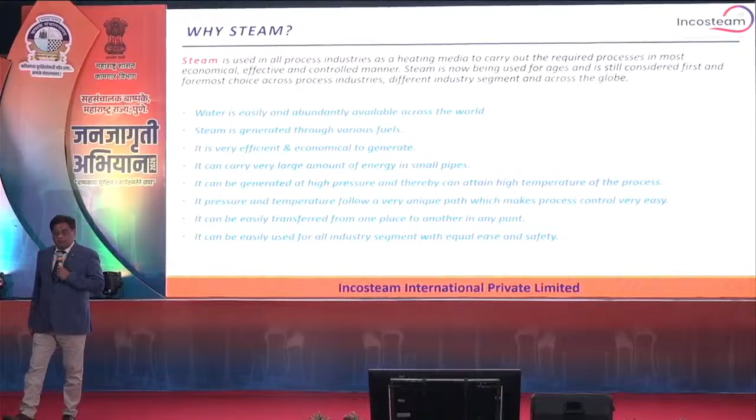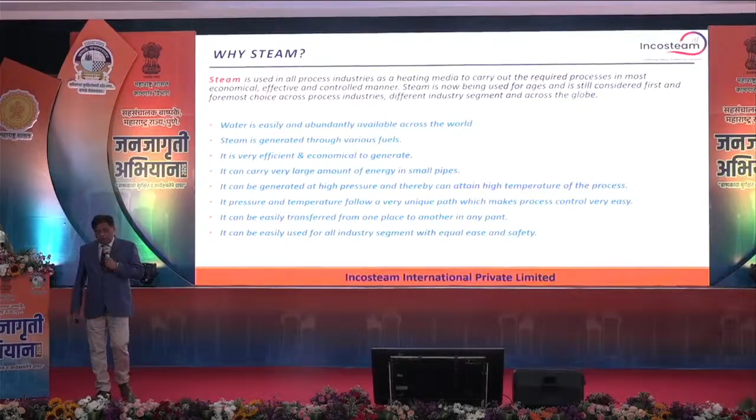So steam, we are all talking about steam from the morning. Steam is the backbone of industry, which is used for all industries. Why? Because it is very easy to make through boilers. Water is easily available. Steam is generated through various fuels, like we can use oil, we can use biogas, biofuels, and we also heard about hydrogen as the upcoming fuel. It is very efficient and easy to generate. It can carry very large amounts of energy in very small pipes. And most importantly, it follows a unique temperature and pressure curve by which we can easily control it for all our processes, however complex they may be.

Steam has been used for ages. I will show you one engine. This is the earliest usage of steam - the first usage of steam was in coal mines. The coal industry long ago had a peculiar problem of water coming into the coal mines. For removing that water, steam was used, and these were the engines developed at that time for taking out the water from the coal mines. That was the first industrial use of steam.

And now we can see that for all industries - chemical plant, pharmaceutical, paper, food and beverages, rubber - you can name any industry, power, everywhere we use steam. It started from coal, and now we are seeing that it's everywhere.

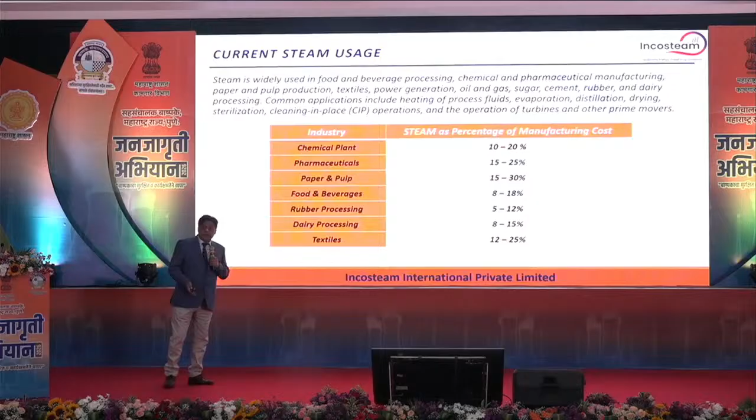Why this session is so apt now is because if you look at all industries, the manufacturing cost of steam is very, very high. For example, for any chemical plant, it can go up to 20% of the manufacturing cost of a chemical, including raw material. So efficient use of steam becomes so very important, because we can see nothing is less than 10%. Paper and pulp is 15%, 30%, pharmaceutical is 25% - that's the entire manufacturing cost attributed to steam.

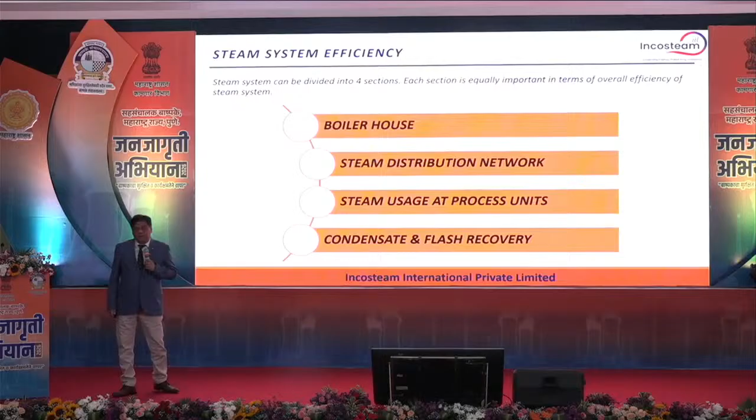If you talk about steam, these are the 4 pillars: boiler house, steam distribution network, steam usage at the process plant, and condensate and flash steam recovery. These are the 4 basic areas.

There is a loss at every stage. So at the end of the session, I will show you how we can optimize this, and I will show you the graph we can follow after optimizing, and what the total benefits are that we can reap out of this optimization.

Any doubts still here? Okay, great.

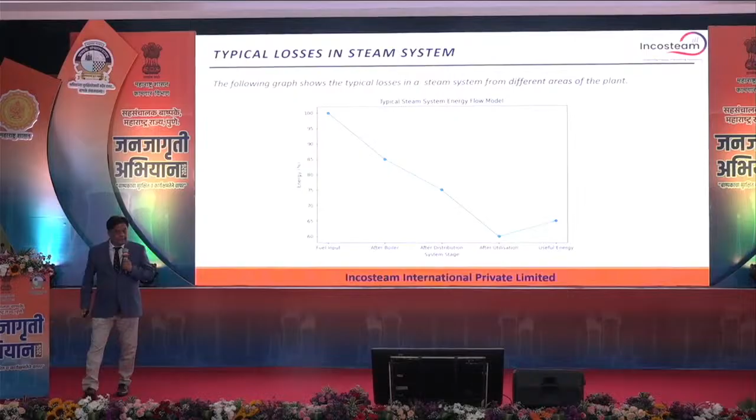If we talk about boiler house, there are different things like stack loss - this session was very nicely covered with our friends from Forbes Marshall. Excess air, poor O2 control - again, the same thing. Blowdown loss, radiation and convection loss, poor feed water heating, quality of steam, which is generally not spoken about - we always talk about efficiency of the boiler but many times miss talking about quality of steam getting out of the boiler. Air preheating - these are a few of the things important to monitor for process boilers. We'll see in between.

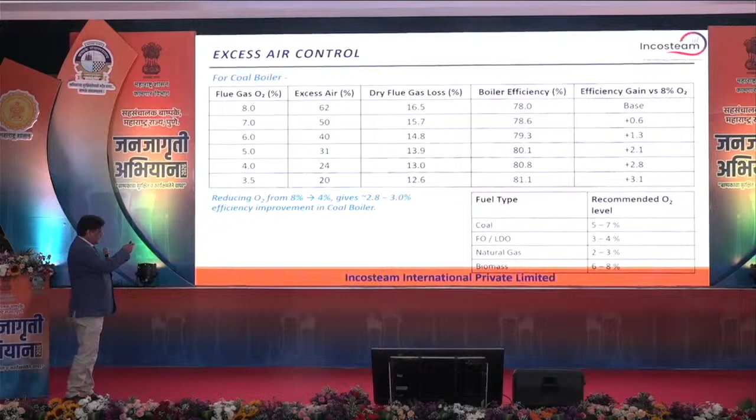Importance of drum level control - this is what we talk about regarding quality of steam, which is actually very, very important. For process boilers - this session is specifically about process boilers - the operations are such that it is start and stop, with batch times, so this becomes very, very important. Another thing with process boilers is the difference between peak load and low loads - that also varies. Most process boilers today use single element control, where we are operating the pumps.

What we talk about with a three-element control system is boiler drum level control, which we all do, boiler feed water flow rate, and steam flow rate. This is so important because whenever there is a sudden surge of demand from the plant, there is a tendency of water carryover. How we can reduce it, how we can foresee it earlier, and ensure our systems are integrated such that these problems don't arise.

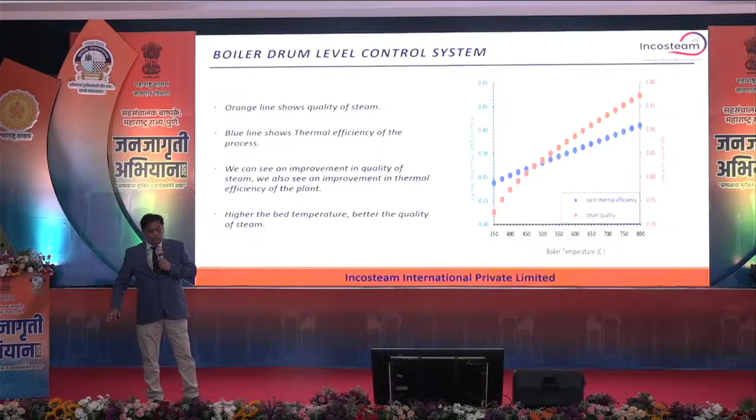So it's important that we have good quality steam, and that means water carryover from the boiler should be at minimum, even with varying loads. If it's a constant load, it's easy to maintain. But with varying load, where the highs are high and peak lows are low, with certain fluctuations, this three-element system plays a very important role, ensuring you still have good quality steam coming out of the boiler even with peak and low loads. Any questions on this? Okay.

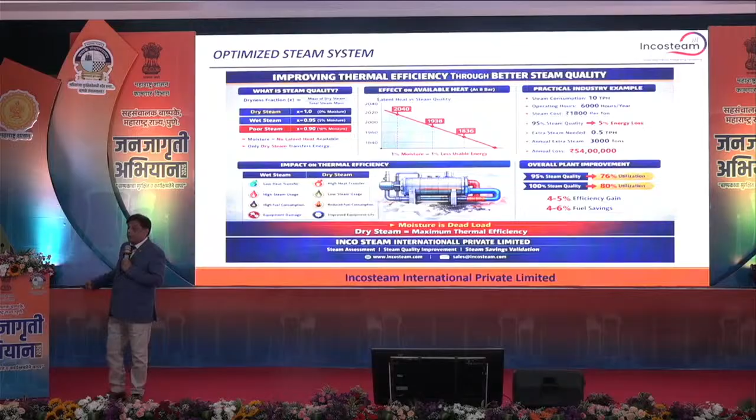Again, with a three-element control system: handle sudden load, better level stability, improved boiler safety, faster response to load variations, and so on.

This is also very important. We have seen that so many process boilers below 10 tons - 4-ton, 6-ton, 10-ton boilers - their feed water arrangements are not properly designed. We talk about starting with the feed water tank size, how we control it, and automation. Antapurka sir was speaking about certain automations in place, and why these help. If you have proper automation in feed water management, we have huge opportunities for improvement. Every 6-degree rise in feed water temperature ensures 1% saving in fuel. So it's very important to have good, or more than good, optimized feed water control.

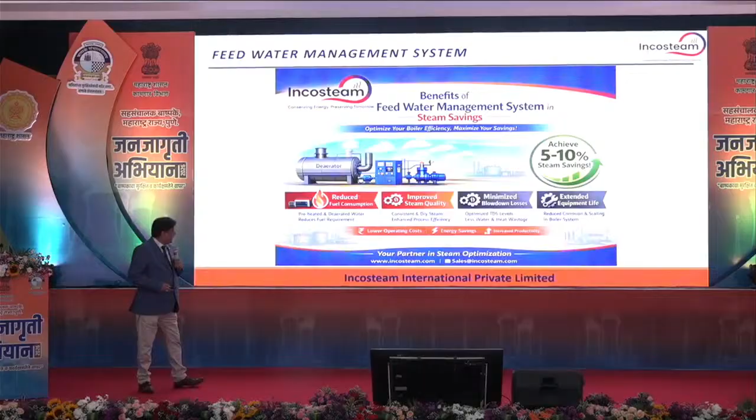I have tried to make pictorial slides here for easy understanding. If you have good feed water control, your fuel consumption reduces, you have improved steam quality, minimized blowdown losses, and the equipment life increases.

Now we talk about the air preheater, which I think many people must be using. Very simply, every 18-degree rise in feed air into the boilers will improve your efficiency by about 1%. I've shown in pictorial form how the combustion air temperature, when increased, gives efficiency improvement of the boiler, along with annual savings. So it improves boiler efficiency, reduces fuel consumption, improves combustion control, and most importantly reduces emissions.

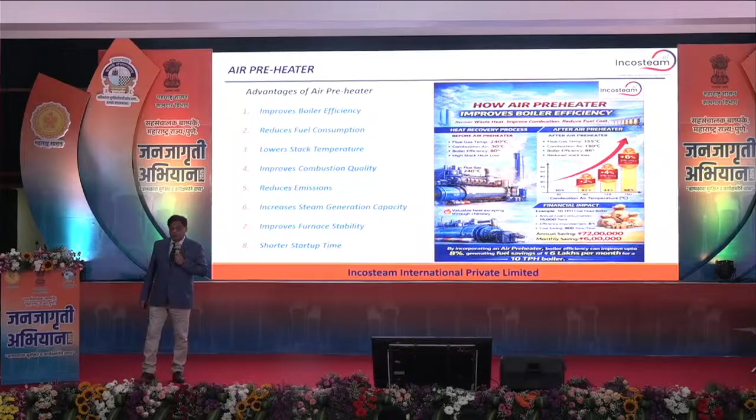More and more we will be talking not only about efficiency but also emission control and increasing generation capacity. As soon as boiler efficiency improves, your total steam generation capacity improves, and you get shorter startup times.

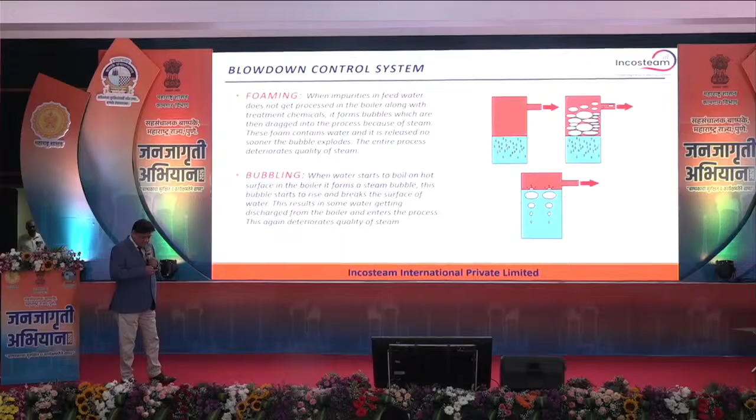Then on the boiler side, I think the last one is control on the TDS. These are the few things by which foaming and bubbling happens and your TDS comes up. We have surface blowdown and bottom blowdown. Why is this important to control? Again, I'll show through a graph.

First of all, it will be very good for the safety of the boiler, and you will also optimize on the overall blowdown total efficiency. You will have lesser blowdown, and more importantly, you will have optimized blowdown with this.

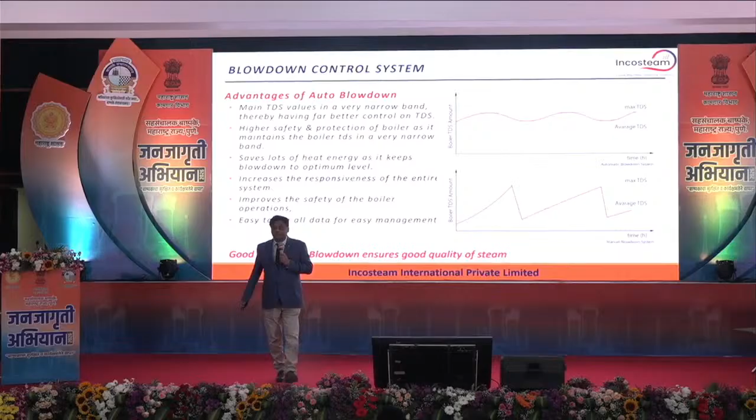Any questions on this? Okay great. So benefit of automatic blowdown - again, I have written the water savings, maintenance. Of course, if your blowdown increases, you have maintenance issues also coming up, and you have fuel savings as well. Because generally anything between 4 to 5% we have blowdown losses, but we can optimize that by keeping the band low.

Now, coming back, the boiler house is complete. We have spoken about all the different elements which actually have an impact on the efficiency of the boiler house. Now we talk about steam distribution network. It is so important - if you remember the first graph, the boiler losses were only 15%, but the distribution losses were about 20%, which is more than the boiler house. Many people talk about boiler house, but distribution also plays a very, very important role.

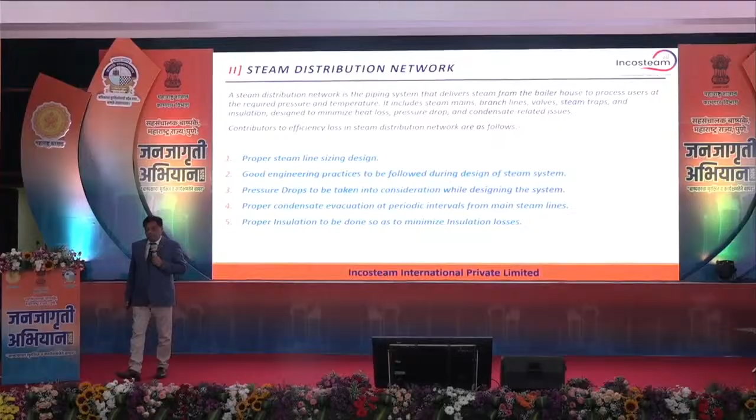Proper steam line sizing design, where we maintain the proper velocities while designing our steam lines. What if our steam is saturated? What if our steam is superheated? We have to take different things into account. For superheated, we take about 50 meters per second, which is okay. But for saturated, we should not go above 25 to 30 meters per second. So those things are there while designing a steam line.

Good engineering practices also play a very important role - how we take the droppings from a main line and all that stuff. Pressure drops to be taken into consideration while designing the systems, again very important. Proper condensate evacuation at periodic intervals from the steam lines, and insulation also play a very important role.

Again, these same points. The steam lines should neither be too big or too small. Both have their impact. If the steam lines are small, what will happen? Steam starvation. What if they are big? The velocities will be much lower and you will have a lot of condensation happening.

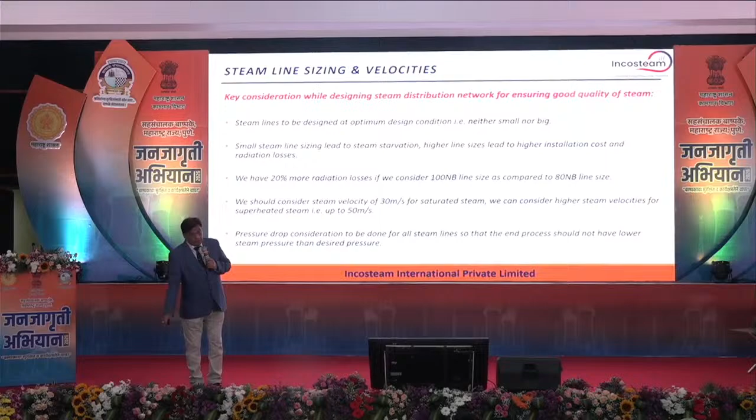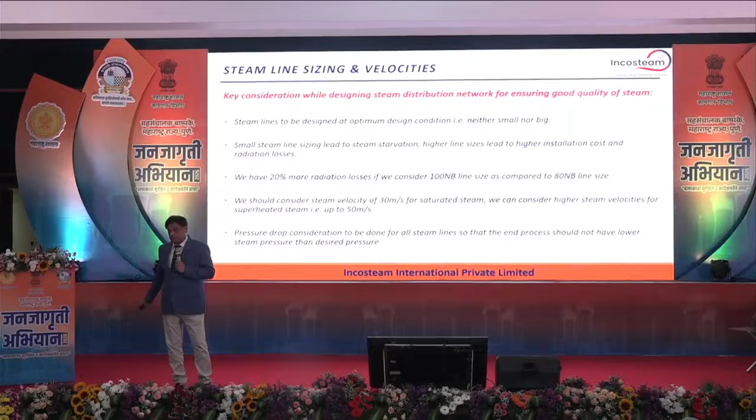Again, when we put up a project, we talk about putting different lines. I will show you an impact, like if we are using a 4-inch line instead of a 3-inch line, we have 20% more radiation losses. But sometimes we do this - while designing, okay we have a 5-ton load, we provide extra safety, make it 7 tons. We go for oversized lines. What happens is you are losing 20% radiation losses forever till the plant is there, each second, each hour, each day. So it's very important to stick to the design philosophy and to the points.

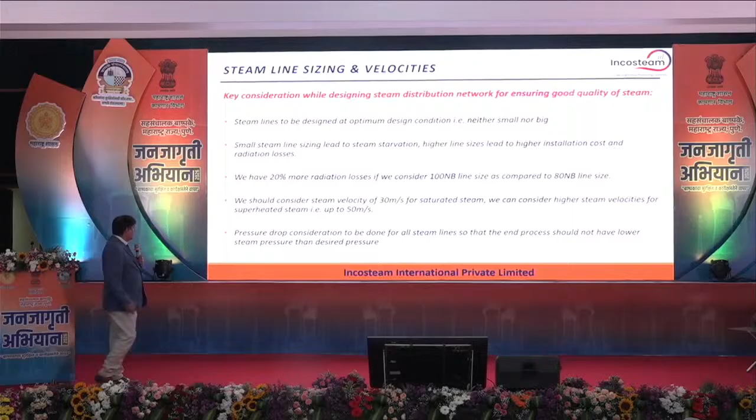Okay, this I covered. And good engineering practices to be followed for ensuring good quality of steam at the end of the process. Ultimately, steam is getting generated by the boiler, you are distributing it, but you are doing the process at the process. So ultimately, what matters is the quality of steam reaching the process - that is what your efficiency of your entire plant will depend upon.

So the entire lining, steam lines which are somewhere 500 meters, somewhere 1 kilometer from the boiler house to the plant, is very important to ensure that the quality of steam does not deteriorate from the time it leaves the boiler house till it reaches your equipment. It should remain the same.

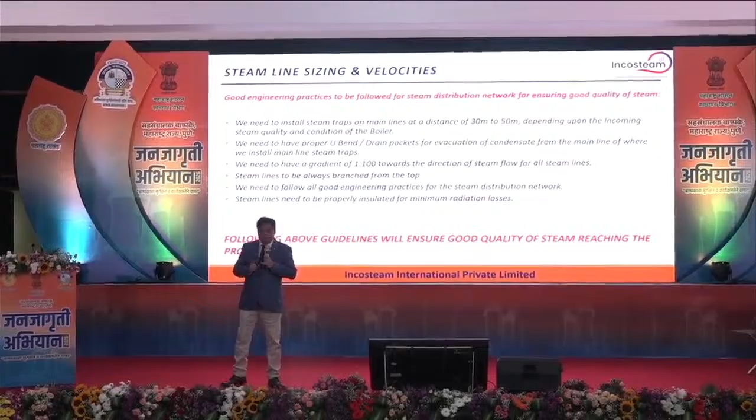For that, you have to ensure that you have proper evacuation of the condensate from the main lines, no water hammering, and all that stuff. You have proper gradients of steam lines to be followed. If you follow that, then we have a good quality of steam reaching our process. Otherwise, your quality of steam will deteriorate, the quality of the process will deteriorate, the efficiency of the process will deteriorate.

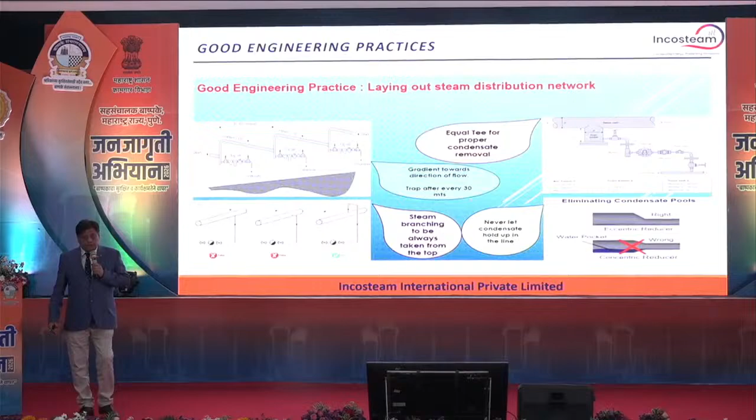Okay, these are a few examples of how good engineering practices are to be followed. Very simple ones - how you have a gradient of 1:100 while putting the line. You have traps after every 30 to 50 meters, depending upon the quality of steam which is there. For superheated steam, it can be 50 meters. For saturated steam, it can be 30 meters. How you take the steam lines always from the top. These are very small things, but people make mistakes there in the plants, and then deterioration happens.

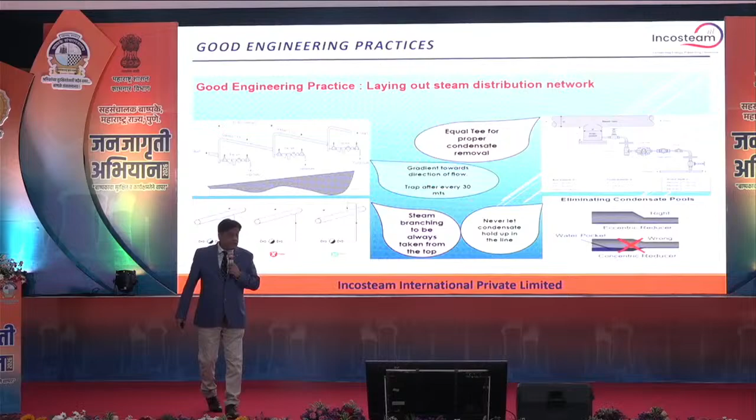How we take out the condensate from the main line, you can see on the right-hand side, top corner. These are important points, but good engineering practices should be followed, otherwise you will have deterioration at the end of the line.

So again, contaminated steam reaching the process is there. Scaling, rusting over a period of time. You have strainers, moisture separators put on the line, which is important. Will not go into much details of it.

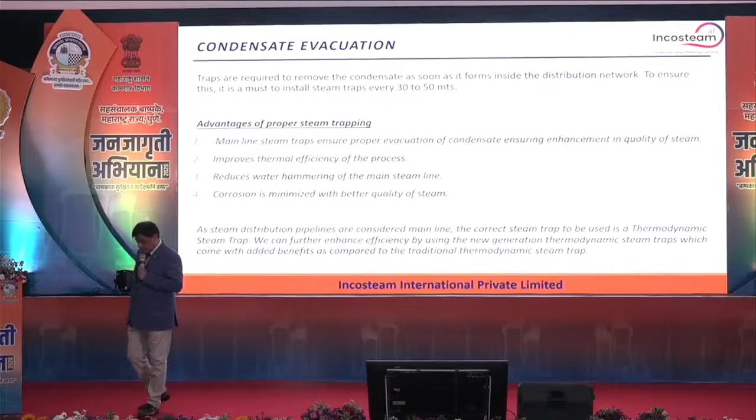Now come to proper steam trapping. When we talk about proper steam trapping, first I will talk about main steam lines. Which traps to be used are very important. For the main lines, ideally thermodynamic traps should be used.

Again, we have seen in Indian industry that we have been using steam thermodynamic traps. Every company must be using it for ages. Still, we have a lot of problems in that. Anybody can pick up the hand who says that 100% of my traps are working fine? I don't think there would be many. Can anybody pick up the hand and say?

No. Everybody has some or the other problem? Yes or no? Yes. Okay. So it's like none of the user's problem. Ultimately, it's how we are designing the system.

These traps have been designed so many ages ago, and we have been using the same philosophy from then onwards. What happens is these thermodynamic traps fail. Fail why? Because of air locking. What do we do after that?

Yeah, he's right. We hammer that. Speak louder. What do you do? We need to hammer it. Everybody has been taught this from ages, but nobody has come out with a solution for that.

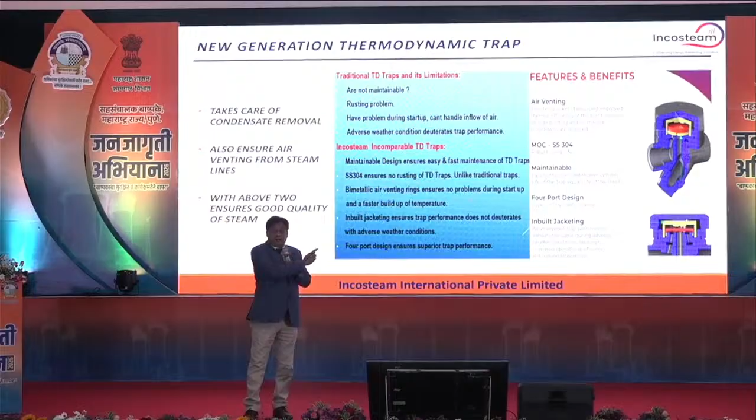Otherwise your quality of steam at the end of the process is a problem. Now, again, this is something about insulation, which I will show it to you with this figure.

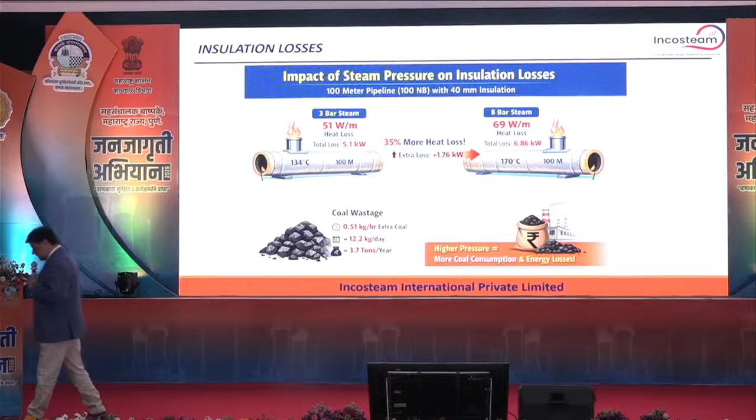Insulation is also so important on the main lines; it plays a very important role with respect to the quality of steam and radiation losses. We can see that 35% more heat losses happen if our pressure rises from 3 bar to 8 bar. With good insulation also, our heat loss goes from 51 watt per meter to 69 watt per meter, about 35% losses. So it's very important to keep our insulations intact.

Do regular checks and audits for our insulation. Otherwise, you will lose 24 hours a day, 365 days a year.

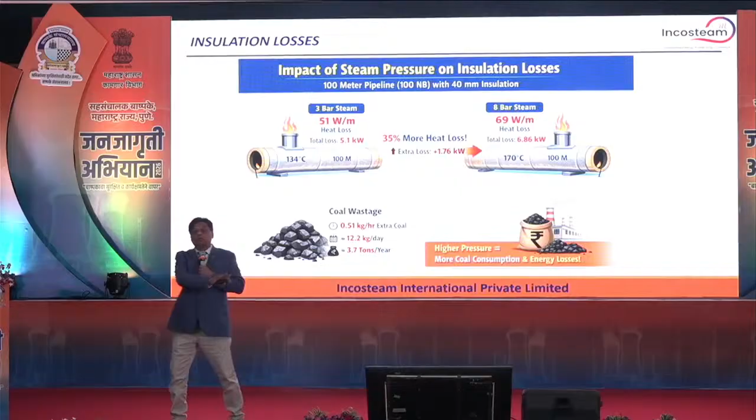What are simple checks for checking the insulation? It's as simple as this: 15 degrees more than the ambient temperature should be your insulation temperature. If you check the insulation temperature, it should not exceed 15 degrees more than ambient. If you keep it below that, your insulation is intact and good, and you will not have these losses. Otherwise, you have huge losses.

Any point on this? Or questions? Good, great. And again, I have shown that potential savings are 25 to 40% with good insulations, with surface temperature of 45 degrees and 65 degrees showing what the losses can be.

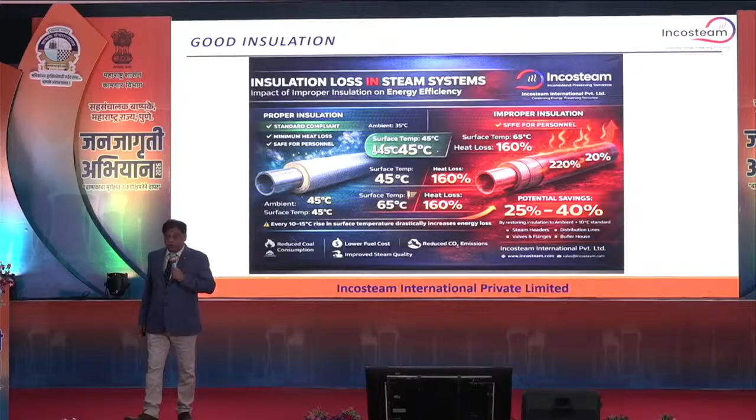Then again, the utilization—now I am coming to the process. Distribution network has been completed; now I am coming to the process at the point of use. At the point of use, we need to ensure that our processes are run at optimized steam pressures. Pressure should not be more or less; these have to be optimized. Very important: poor condensate drainage, air venting through the steam system, which I will cover in slight detail.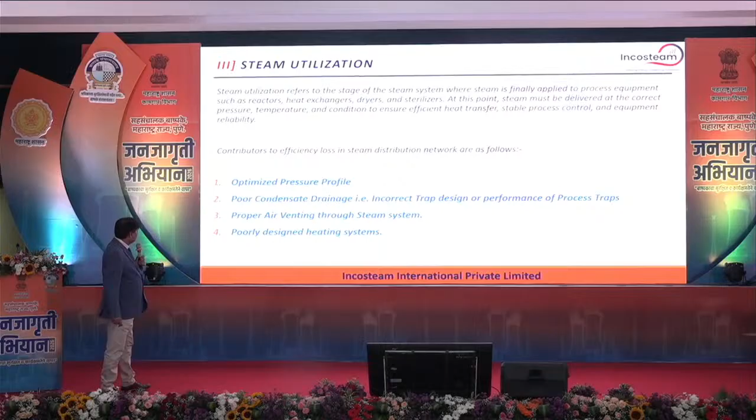So why am I saying pressure profiles are so important? We can see the difference in latent heat is 86 kilojoule per kg between 3 bar and 7 bar. Latent heat at 3 bar is 2133, and at 7 bar is 2047. That's about 4.2%. Meaning you will save about 4.2% of your steam by reducing the pressure.

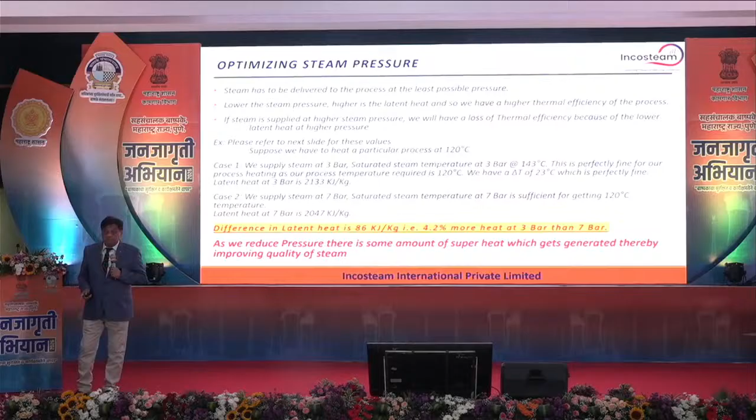That's why we use PRS stations, pressure reducing stations. Everybody uses it for the process. Why? Without PRS, when we are overheating, you have so much steam transferred without transferring its latent heat. So your latent heat is not transferable and you lose on that. With proper optimization, you have optimized heat transfer and save a lot.

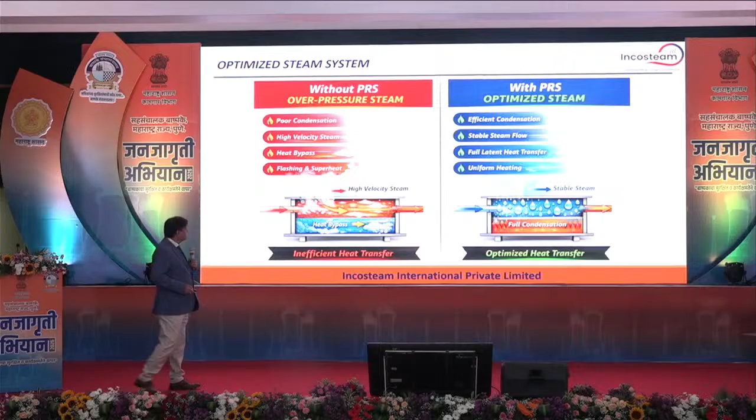So these are pressure reducing stations, which I will not cover in detail because everybody must be knowing it and using it. Now let's come to process trapping. Previously we spoke about mainline trapping, now we are talking about process trapping.

Generally, when we talk about process trapping, we have ball float traps, thermostatic traps, bimetallic traps, and clean steam traps. Ball float traps are most widely used for all process applications. Any industry, we use ball float traps.

Thermostatic traps are basically used for tracing applications - for tracing line applications, in big refineries where there are kilometers of piping, and where the entire fluid flowing has to be kept at a particular temperature. At those places, we use thermostatic traps.

When we talk about bimetallic traps, bimetallic comes into play where float traps and thermodynamic traps cannot function, where the temperatures are so high. Then these bimetallic traps come into play.

And finally, the clean steam traps. Clean steam traps are very specifically used for pharma industries and bio industries. When we speak about clean steam traps, there are four different criteria for it.

First, it has to be made out of 316L material - all traps are designed for 316L material. The design of the trap is such that it is self-drainable, meaning there should not be accumulation of any condensate. Otherwise, there will be bacteria formation, which is not good.

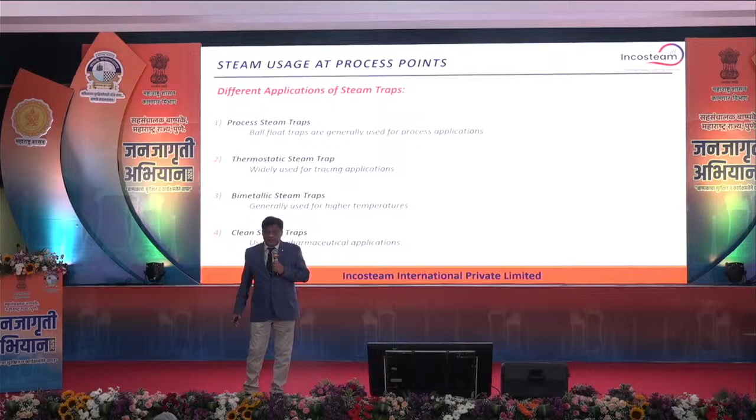Then the surface roughness inside the trap should be less than 0.4 Ra. And finally, all the traps have to be ENP plated - electroless nickel plated. These are the four criteria for any clean steam trap. So these are different traps for the process applications.

We spoke about thermodynamic traps for mainline leaking. What about process traps? If process traps leak, what happens? Huge losses to the plant. I've given an example: at 2 bar, if a 1-inch trap fails, one single trap can cost you about 5 lakh rupees per year.

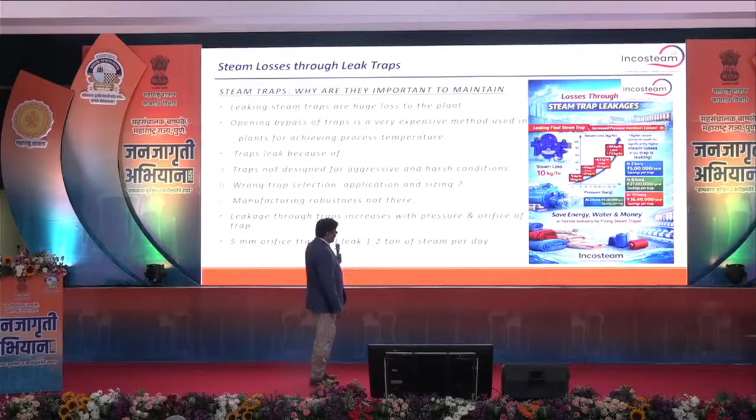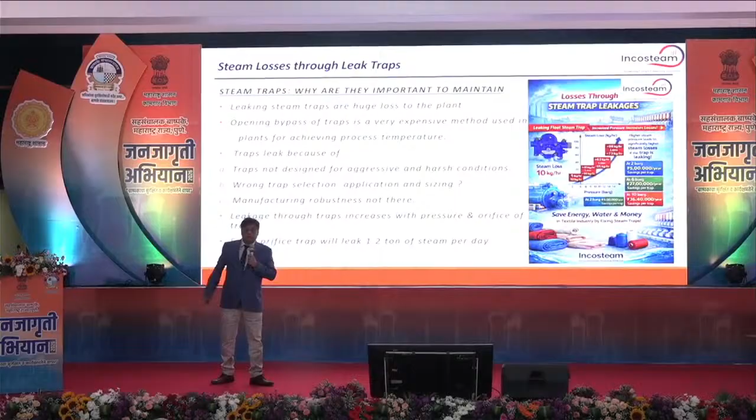Similarly, at 6 bar, it will be 27 lakhs. One single trap can drain you this much money. Imagine the number of traps in a plant and how much you can save. This is a simple pictorial slide for easy understanding - any 10 bar, 10 TPH plant would have about 100 process traps. If we ensure the traps are working fine, we reduce our leakages and improve our system efficiency.

Any points still here? I think there should be many questions. Nobody is asking. Okay.

How do those figures come up? This is a simple graph showing that as steam pressure increases - at 2 bar you have 5 lakh saving, for 6 bar it is 27 lakhs - why? As the pressure increases, for the same orifice your leakages increase, and it increases in a parabolic form.

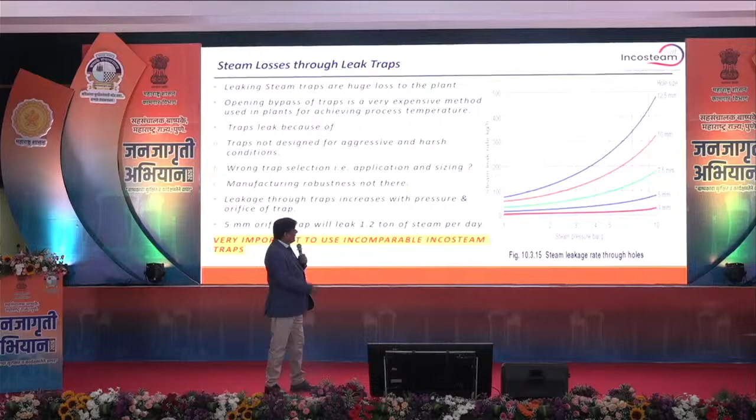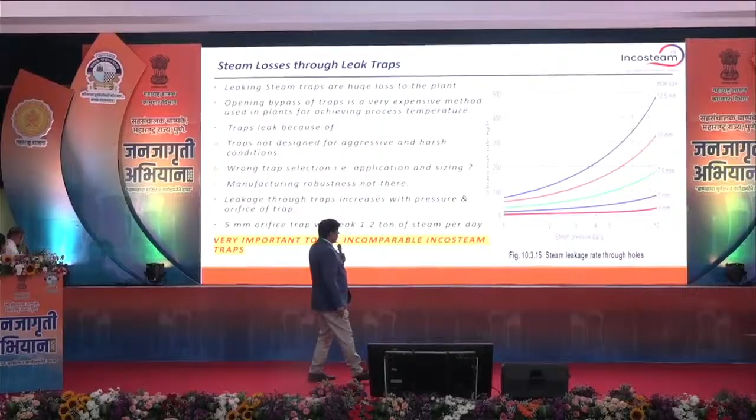So it's very essential to ensure that our traps are operating in the right manner. This graph shows, for example, a 5 bar 10 mm orifice trap would leak about 170 kgs of steam per hour, following this particular line up to the orange mark. That much it will lose.

Okay, great. Sorry, I'll try to finish fast. These are ball float traps, a simple little thing designed as a complete module. Now you don't have to fabricate by putting a strainer separately, NRV separately, valve separately - you can get these modules.

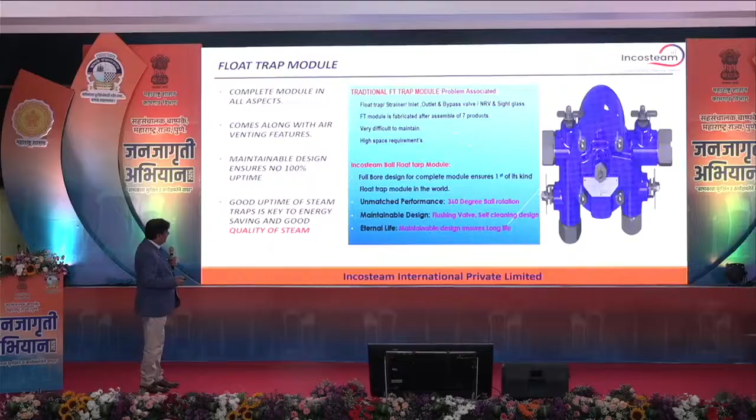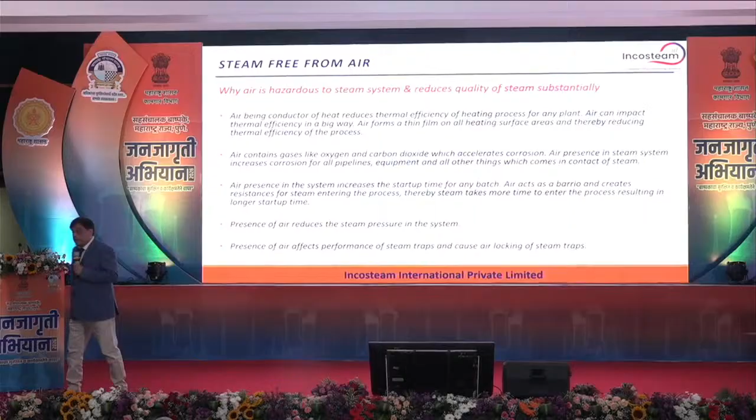Now, coming to one more very important thing: air venting. When we talk about process boilers where you have a lot of feed water coming in, fresh water coming in, lots of starts and stops because of batch processes, air will come into your system, into your steam cycle. Air has to be removed from the steam. Otherwise, air is a poor conductor of heat and it will reduce the thermal efficiency of your equipment.

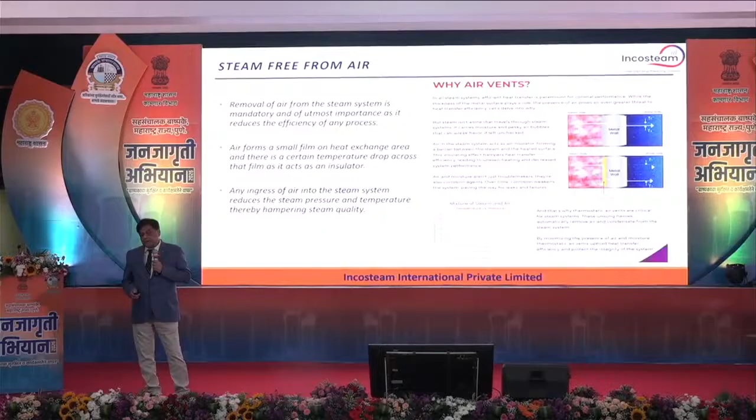From my calculations, air is even worse than condensate. It is more dangerous than condensate in the steam line. So you can see the drop, and what it will impact is your entire equipment's thermal efficiency of heat transfer.

So what do we do? We have air vents which have to be put on the top point of your equipment, on the steam lines, on the topmost point, because generally the air reaches the top point and from there it can be released. These work on the principle of a thermostatic capsule, by which it senses between air and steam with respect to the temperature.

Again, in a reaction in a chemical vessel where we did a certain exercise, it can save you like 15 to 30 lakhs per year by ensuring that you don't have air into your system. As high as that, by installing air vents.

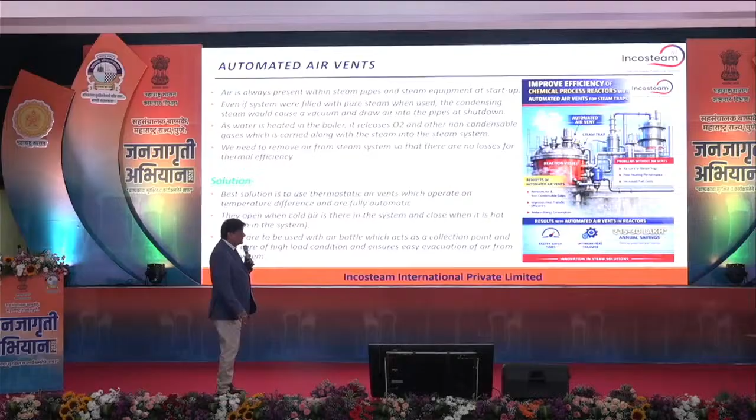So this is very important, and it's one particular thing which is totally missing in most of the plants that are already set up. Now, in new plants, all the consultants are ensuring that air vents are put onto equipment, and the OEMs supplying the equipment are also putting automated air vents. Otherwise, all the old plants don't have it. So it's very important to have this.

Okay, coming fast because we have a couple of minutes more. So, flash steam generation. We have crossed the process side and our equipment's efficiency, which we spoke about. Now the recovery part, which is the flash steam and the condensate.

Again, if we talk about 10 bar steam, which many plants use, how much flash steam will it generate out of the equipment? If you go up from 10 bar to the first line, if it is exposed to atmosphere, it comes to about 16%. So 16% of flash steam will get generated.

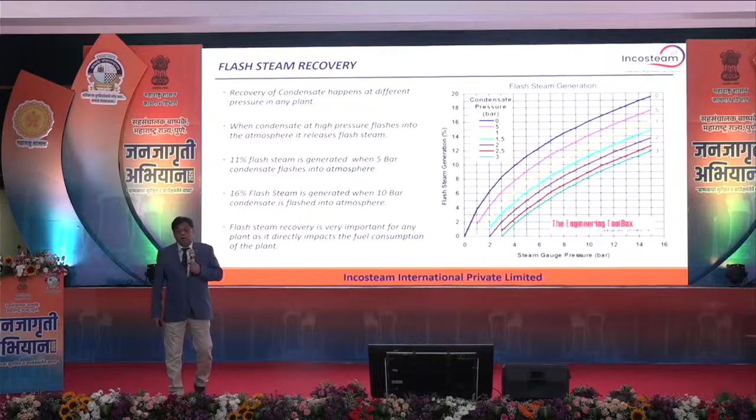So this is very important for us to save the flash steam. Again, in pictorial form, I have shown how much savings you can achieve by ensuring that you recover all the flash steam. Flash steam will get generated; the process is such that it will get generated. But you need to ensure that we recover that flash steam. Once you recover it, you put it to good use.

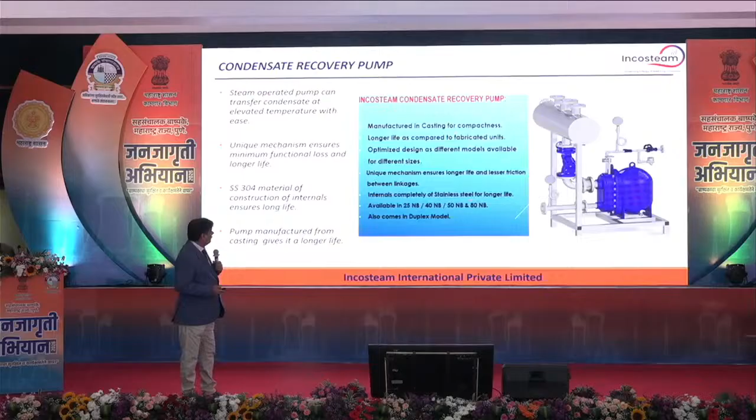Apart from recovering the condensate, we save on water, but we also save on steam, which is about 20 to 30% of the total steam. So it is very important for us to recover the condensate as well.

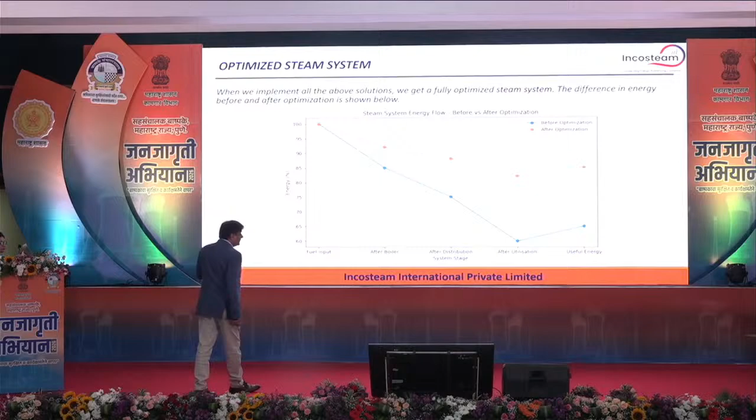Now this is the final slide. The first slide which I showed for the process was the blue line, showing where we stood with respect to the losses. In general, most process plants follow that blue line today, maybe with some ups and downs. The orange line shows what we can save after optimization. So the total saving can be as high as from 85 to 65, that is 20%. That means you can reduce your steam cost by 20%, after optimizing these things.

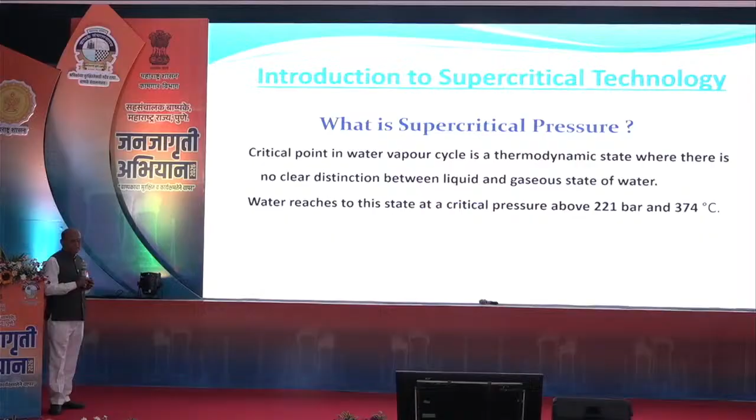Technology. Now why are we coming to this technology? You see, drum pressure till now, boilers were operating up to 200 megawatt, 200 bar and less than that also, and superheater and reheater temperatures were up to 540, 565 degrees centigrade. Now this was the limitation.

Why has it come? You see, because as the pressure increases, the density difference comes closer together, and this is the reason subcritical technology has to stop there and there only. Then only, till now, in between 200 bar and 221 bar, there are certain units operating under assisted circulation.

Assisted circulation means they have to provide one additional pump also, but that operation is very rare. Now the limits of natural circulation - due to density difference, there are limitations of natural circulation.

Then plant thermal efficiency, till now we get up to 35% in subcritical boilers, that is power boilers. Fuel consumption was also increased as compared to supercritical technology. Then CO2, SOx, NOx emissions were more. Performance related to environmental impact was also worse. Then the limit of flue gas exit temperature and unburnt losses were also more. And this has given rise to the next improvement, which is the supercritical condition.

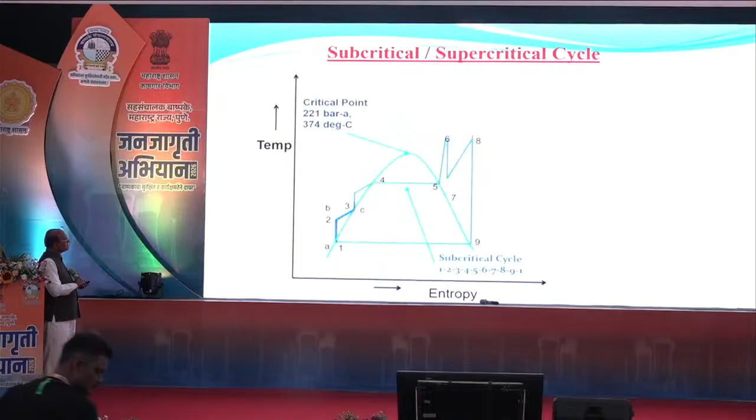And this is the supercritical cycle, that is A, B, C, D, E, F, G, H, I, back to A. So this is the difference.

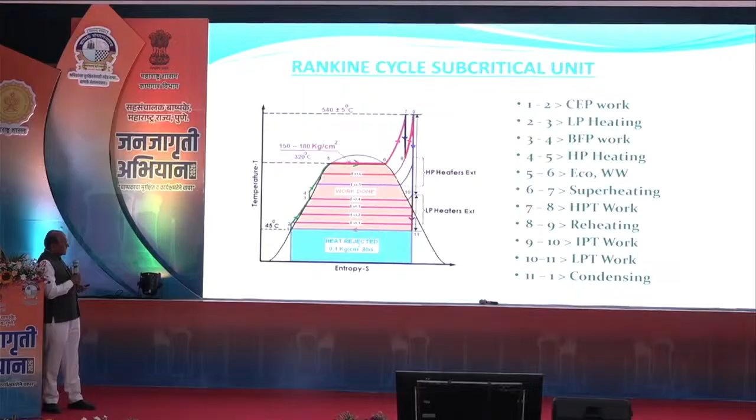Now, Rankine cycle for subcritical unit. 1-2 is CEP, that is condensate extraction pump work. Then 2-3 is LP heating, 3-4 is boiler feed pump work, 4-5 is HP heating, 5-6 is economizer and water wall, 6-7 is superheating, 7-8 is HPT work, 8-9 is reheating, 9-10 is IPT work, 10-11 is LPT work, and 11-1 is the condensing, that is the heat rejection.

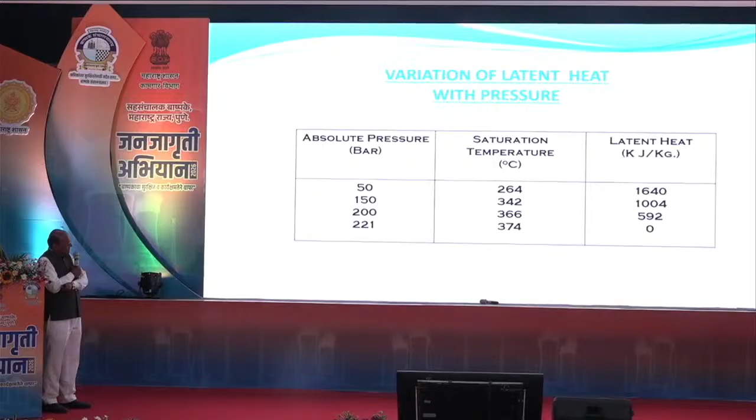Now we will come to the point of variation of latent heat with pressure - how the latent heat varies as pressure increases. You can see that absolute pressure increases from 50 bar to 221 bar, and saturation temperature also increases from 264 to 374 degrees centigrade. And latent heat decreases, becoming zero at 221 bar. And this is the technology which works above this point.

Now an important phenomenon in this technology is departure from nucleate boiling. First, we must understand what type of boiling takes place in the tubes of subcritical boilers. There are two types: film boiling and nucleate boiling. Nucleate boiling occurs when the surface temperature is hotter than the saturated fluid temperature by a certain amount, but where heat flux is below the critical heat flux. Nucleate boiling occurs when the surface temperature is higher than the saturation temperature by between 4 to 30 degrees centigrade, meaning overheating takes place in that range.

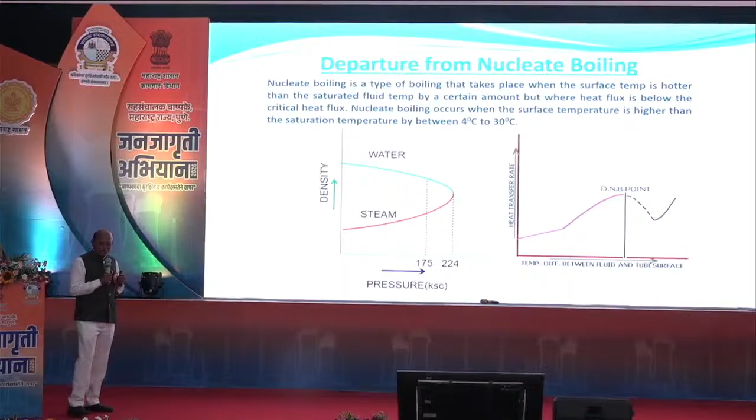Now see the graph of density versus pressure. As the pressure increases, the density of steam and density of water become equal. Correspondingly, departure from nucleate boiling occurs when the temperature difference between fluid and tube surface reaches a particular point. That point is called DNB.

So there should not be departure from nucleate boiling when the boiler is in operation. Now, what is the construction of the supercritical boiler water tubes? Two types of tubes are used. On the left hand side you see the rifle tubes, and on the other side you observe the plain tubes. Which is better? For these supercritical boilers, to have control on mass flow rate, these rifle tubes are designed. The minimum mass flow velocity in the plain tubes is more compared to the minimum mass velocity of the rifle tubes.

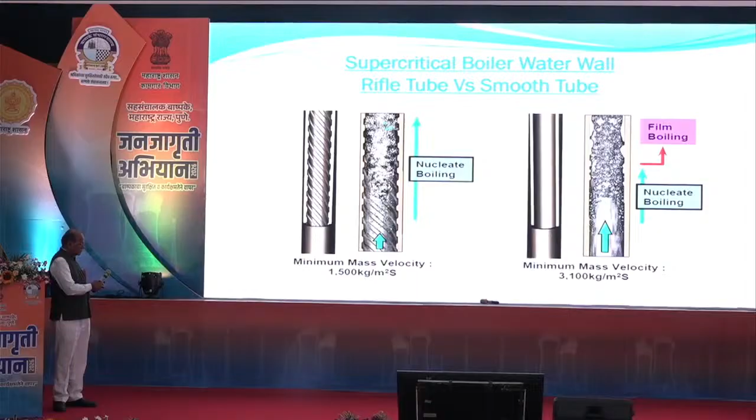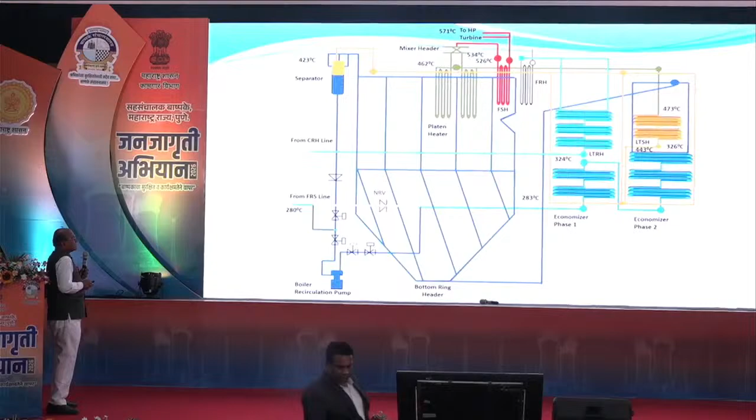Now we will come to how feed water is controlled. In subcritical power boilers, drum type boilers, 3 element control is there, which we have discussed already. Now in drumless boilers, that is supercritical boilers, feed water is controlled by 2 means: one is water to fuel ratio, and second is OHD, that is overheat degree. In subcritical boilers, if there is very low water level, the boiler trips. But in this case, if the furnace temperature increases up to 30 degrees centigrade beyond the required level, the boiler trips. That temperature is called the overheat degree, and that is the protection for low water level.

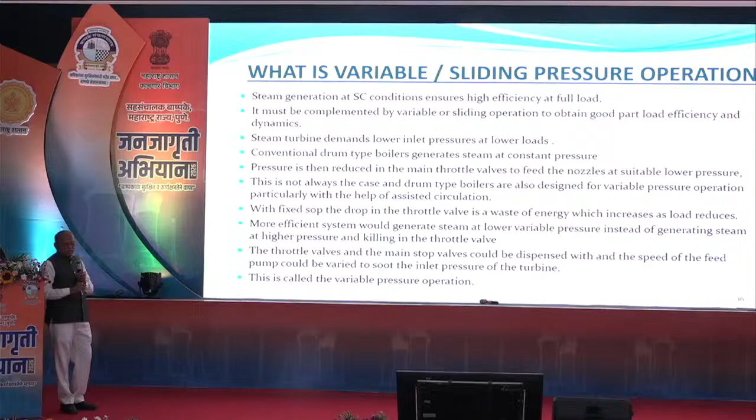Now what is variable sliding pressure operation? This is very important in this boiler. In subcritical power boilers, we observed that depending on the load, full load or part load, throttling of the steam takes place in the turbine. This type of throttling does not take place in supercritical boilers. Now we will understand how it takes place.

Steam generation at supercritical conditions ensures high efficiency at full load. It must be complemented by variable or sliding pressure operation to obtain good part load efficiency and dynamics - meaning even at part load there should not be a drop in efficiency. The steam turbine demands lower inlet pressure at lower loads. Conventional drum type boilers generate steam at constant pressure, which is then reduced in the main throttle valves to feed the nozzles at suitable lower pressure.

However, this is not always the case, and drum type boilers are also designed for variable pressure operation, particularly with the help of assisted circulation, meaning there may be sliding operation as well. A fixed pressure drop in the throttle valve is a waste of energy, and this wastage is avoided in supercritical operation, which would otherwise increase as load reduces. A more efficient system generates steam at lower variable pressure instead of generating steam at higher pressure and killing it in the throttle valve.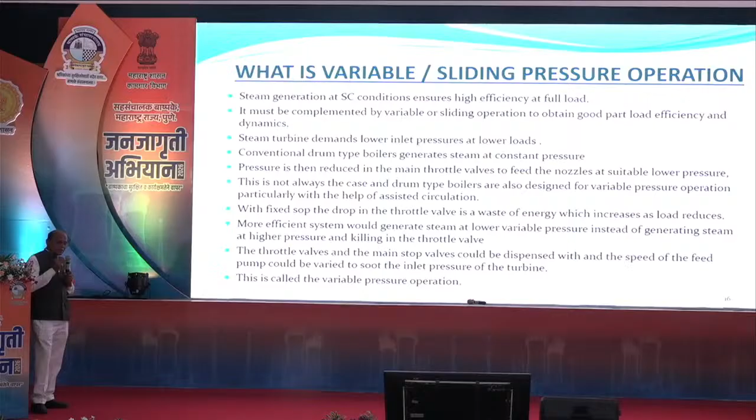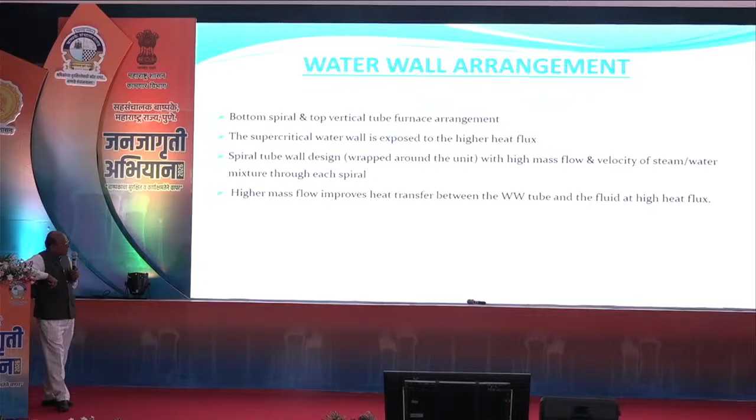Now the water wall arrangement, as we have discussed, has a bottom spiral and top vertical tube furnace arrangement. The supercritical water wall is exposed to high heat flux. The spiral tube wall design is wrapped around the unit with high mass flow and velocity of steam and water. Higher mass flow improves the heat transfer between the water wall tube and the fluid at high heat flux.

Now this is the reason why, right from the beginning at the bottom, plain tubes are not used. Up to the bottom half portion of the furnace, the tube construction is inclined at 30 degrees. That 30 degree helix starts from the bottom header and ends at the top of the bottom furnace.

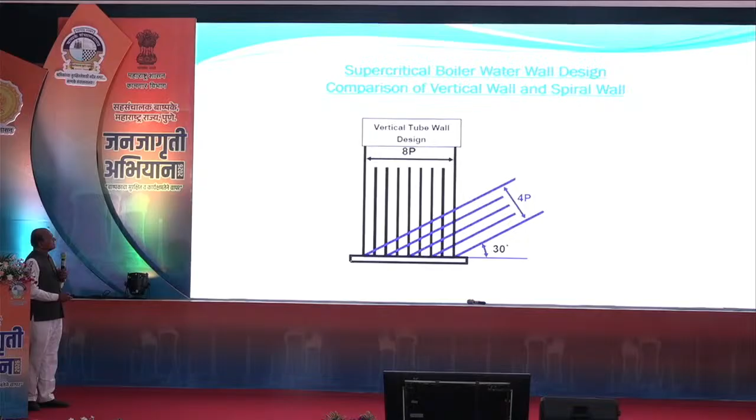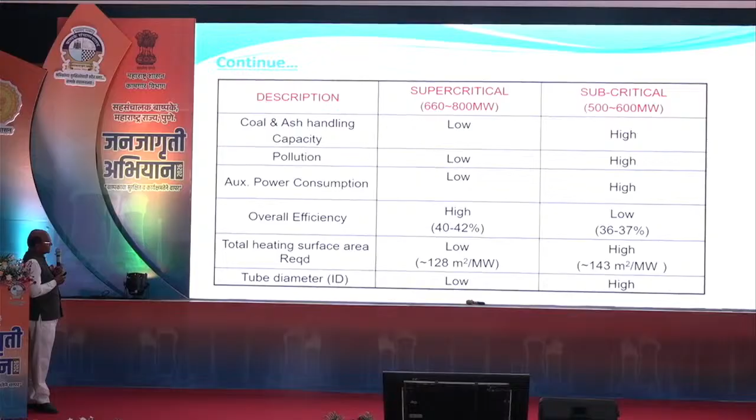Then coal and ash handling capacity is low for supercritical, high for subcritical; pollution is low versus high; auxiliary power consumption is low; overall efficiency is up to 42%, and low is 36 to 37%. So in some cases, now the boilers are even running on advanced ultra supercritical.

What is meant by advanced ultra supercritical? They are running up to even 400 bar and 750 degrees centigrade. In that case, the efficiency is even up to 50%.

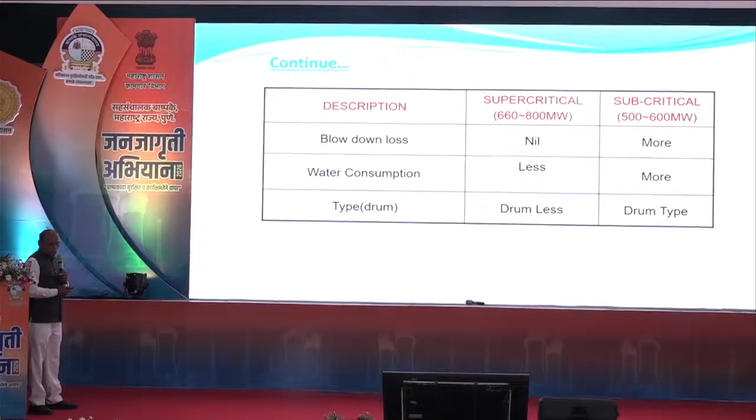Then blowdown loss is nil, but up to 30% load, there is a blowdown. Water consumption is less.

Now this is one of the advanced supercritical tube materials where the boiler is working up to 300 bar and 620 degrees centigrade. So this is high grade alloy steel.

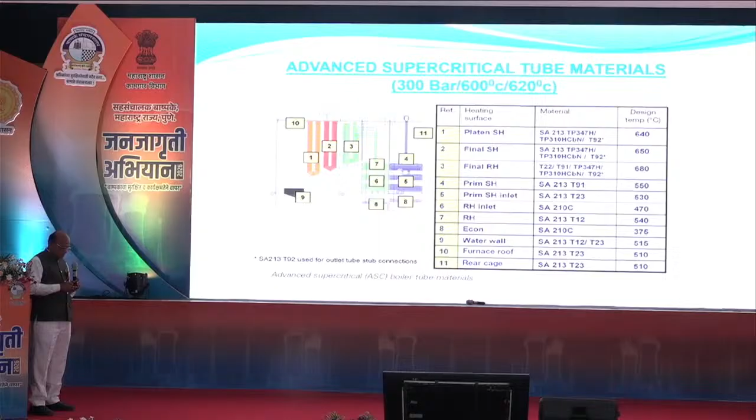Then steam water cycle chemistry is also very stringent, you can see. The time restriction they have given me, but I myself will extend this, because basically it is difficult to understand. Again, time is limited, that is a restriction. So anyway, yes. Even then we have to run. Okay, that is basically, I will understand this.

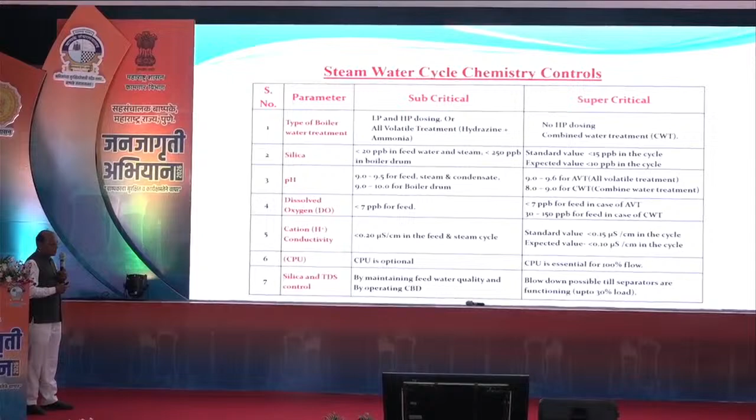This all volatile treatment is done by hydrazine and ammonia, this is very important. And the second aspect of this treatment is CPU, condensate polishing unit, that is external treatment. There is no internal treatment in this type of technology.

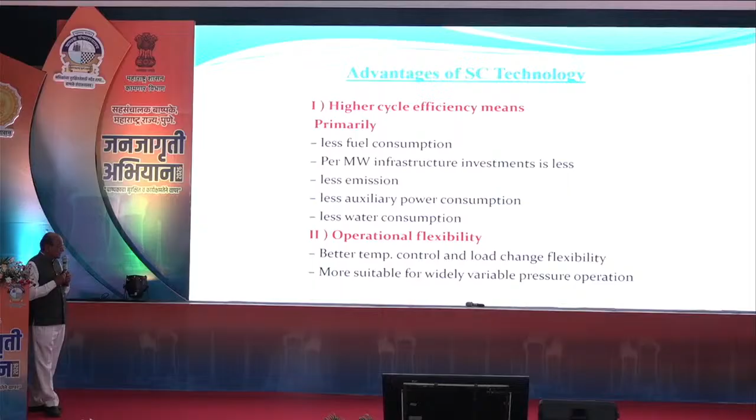Now what are the advantages? Higher cycle efficiency means primarily less fuel consumption. Per megawatt, infrastructure investment is comparatively low. Less emission, less auxiliary power consumption, less water consumption. Operational flexibility is more - that is better temperature control and load change flexibility, more suitable for widely variable pressure operations.

Now what is the economy? The economy is in fuel and all operation activities. Now this is very important - the approximate improvement in cycle efficiency, how it is increased. That means 0.005% efficiency increase per bar if the pressure is increased by 1 bar. So you multiply that by 0.005, and you will get the result.

Now the temperature increase gives 0.011% efficiency per degree centigrade. Now this is the scenario of how the pressures were increased along with the temperature, and how the efficiency is raised during the development of this technology.

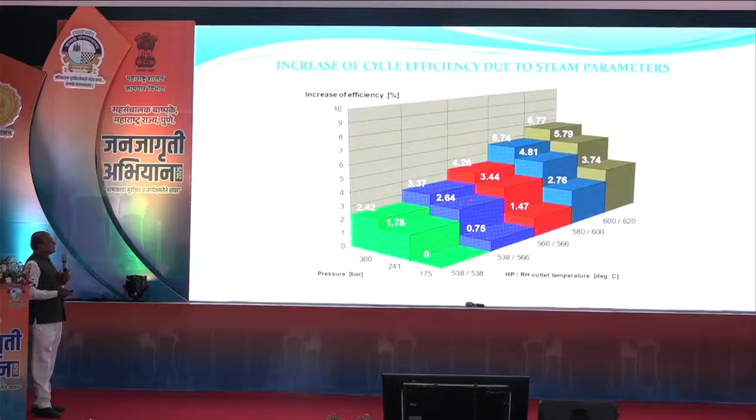Now, what are the challenges? Water chemistry is a very important challenge for this. Then metallurgy, then more complex reactions. Maintenance of tube leakage is difficult. Then ash sticking tendency is also more.

Then proposed supercritical units in Maharashtra: 2 into 660 megawatt Koradi, Mahagenco, again BHEL. 1 into 800 megawatt Paras, Mahagenco, BHEL. 1 into 660 megawatt Chandrapur, Mahagenco, BHEL. 1 into 800 megawatt Bhusawal, Mahagenco, BHEL.

Now Maharashtra load demand - what is our load demand? At peak hours load demand is 29,500 megawatt. Lowest demand is 23,000 megawatt.

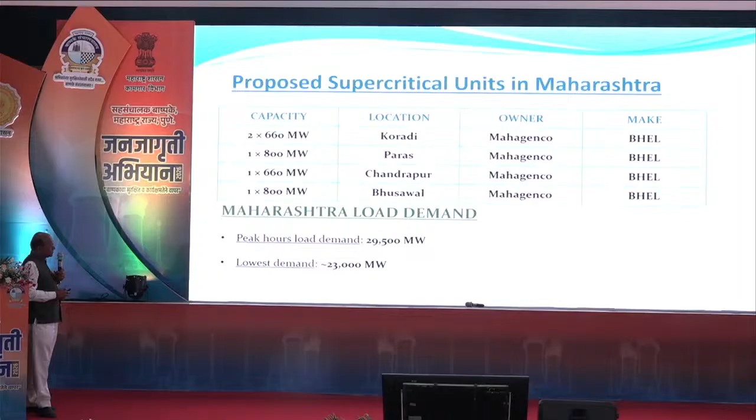Now what are the top 10 thermal power plants in India? Whenever we are discussing why supercritical technology, you will get the answer to this question in the last situation.

Now India's electricity generation and capacity - our India's installed capacity till 2025 is 5,09,740 megawatt. Maximum demand is 2,42,490 megawatt. And the grid capacity, existing grid, that means to carry the electricity generated, is 5,70,000 megawatt. This is inclusive of subcritical and supercritical boilers working today.

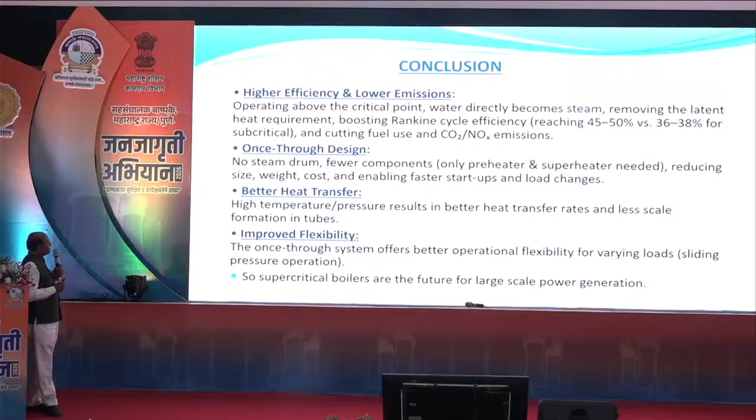Now the conclusion is that higher efficiency and lower emission leads us to adopt this technology. This is the reason. Then design - once through design - the components, there is no steam drum, and weight reductions are done compared to subcritical. Then better heat transfers are observed in this technology. Then there is improved flexibility - once through system also gives flexibility of operation.

And I think the answer of this question, today's lecture - why supercritical technology - I hope all of you may have received that. So this is it, thank you.